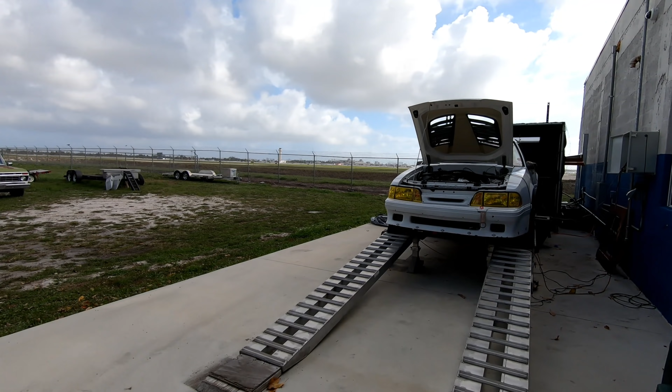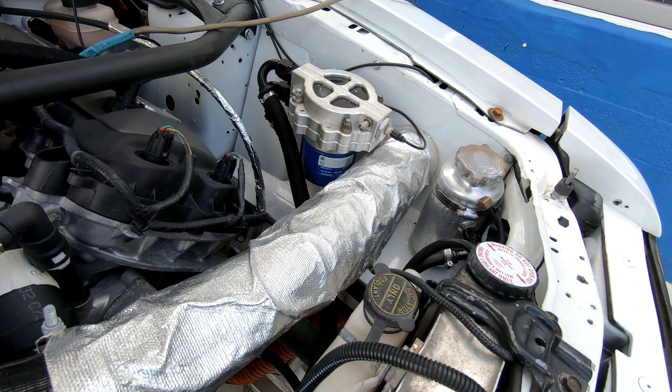That's the plan for today, and the test vehicle is going to be Frank Perdomo's Gen 1 equipped Foxbody road race car. As you can tell, it already has a smaller cold air than factory, but as you saw in previous videos, it's sampling the air from the fender away from any potential turbulence. It's a totally stock Gen 1 motor on a Ford Racing control pack, and it's currently on pump gas.

What we're going to do is warm it up, get it up to temperature, run it, make at least 2 hits to see what kind of numbers we get for baseline. I'm going to try to do it different this time - I'm going to try to max out this particular combo on his car, and then do the same thing on the 18 manifold, because the 18 manifold at the end of the day is the one that's going to stay.

This is Frank, by the way, everyone. If you want to roll it so the drivetrain gets warmed up, just hit the red button, I think. What you got going on in the aim dash? Show people the aim dash stuff, brother.

Here, grab the AIM MXG. It's a good lap timer for road racing. It's kind of pricey, but it's good. It has GPS antenna, CAN bus capabilities. You can program just about any sensor you want into it, in or out of their catalog. And you got all these different dashboard layouts you can run, customize with a laptop.

Different dashboard layouts you can run, different parameters you can set up. So you can see you got a tach. Just a really neat tool, really expensive tool, but it's really good for road racing. We use it a lot. Gives you predictive lap times too while you're running. They have all sorts of expansion modules for it.

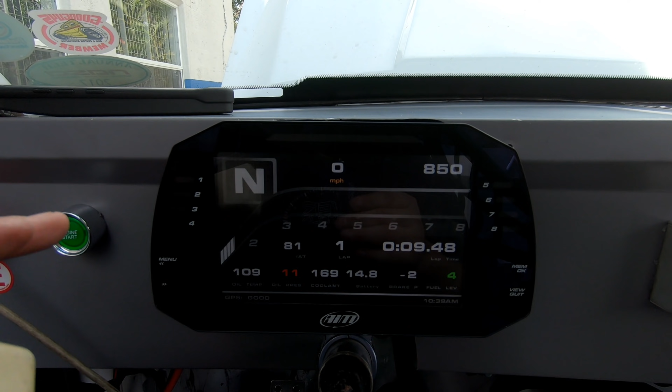So they have them in smaller sizes too. They now have a Strada that has, instead of all the racing stuff, all the factory looking symbols and turn signals and stuff like that. So it's not a bad option for Coyote swaps, F150s, and it's more streetable than the other.

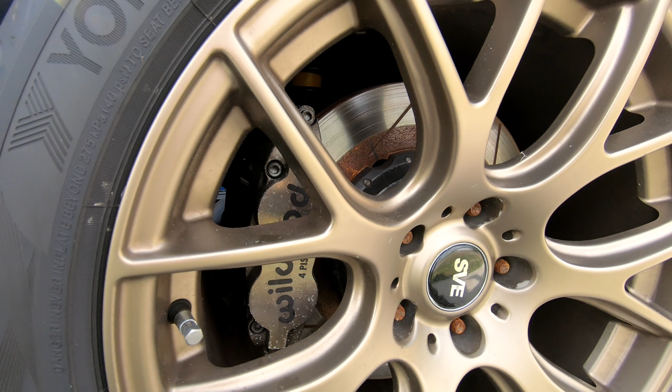Go around the car and see what the deal is. He's got his exhaust coming out the side, so people can definitely hear him. He's got a real nice Wilwood brake setup on the car, some SVE wheels. Car looks good, it's sharp. We left the wing on for maximum downforce on the dyno.

I'll go over the straps real quick. But yeah, let's make some baseline hits.

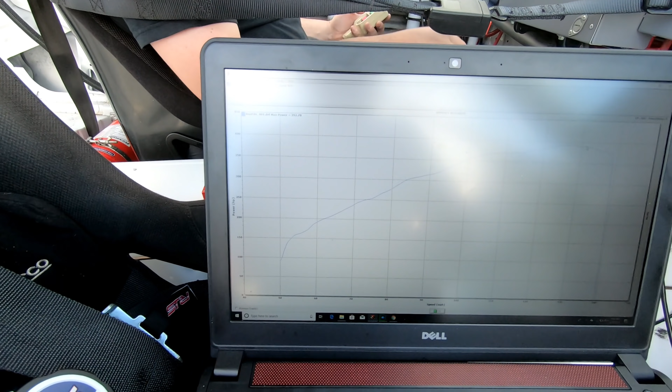She made 392. Let's go to torque right here. How much torque? 392, 362 as it sits.

So I'll look at the log, see what it did. I'm gonna try to do this - just the plan, I'm gonna try to max out this combo just to see what it does. And if there's meat on the bone, cool. If not, we'll just swap it all over.

When we originally did it, we got to a comfortable number. Everything is okay, we didn't try to max it out. And then we just started working on detuning it, which - I'll see what kind of gas quality we got, and if we need more timing I'll throw it in there. I lost the fuel pressure.

So I didn't like it. All right, so we'll use 392 as the baseline. All right, cool.

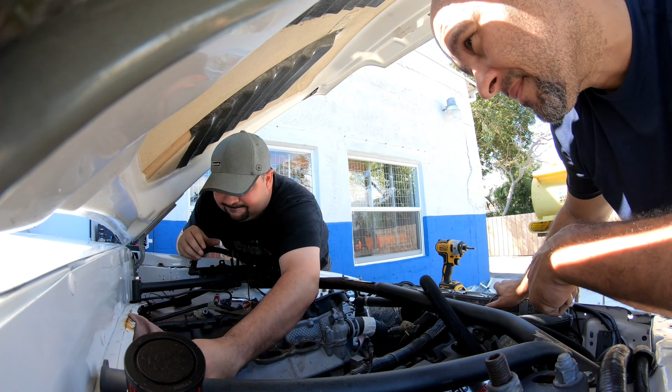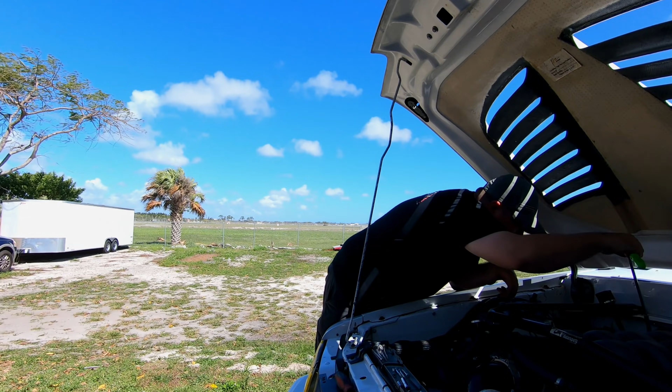Look at this day, I'm sorry guys, I gotta appreciate how beautiful it is today here in Florida. Probably what, 77, 76? The humidity is the key to that. There's no humidity. There's a breeze. The sun's out, it's hot in the sun. Yeah, but I'm telling you guys, why the hell do you live anywhere else? No offense.

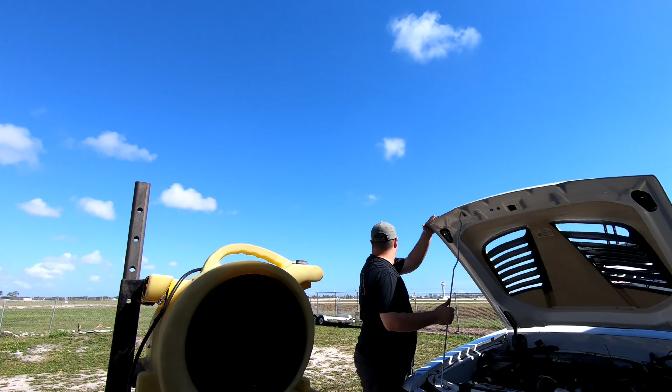Okay, back to this, sorry. Wish we had seasons, yeah, I just wish we had snow. I like to see the leaves change color. Whoa! And then rake them for 3 months. Shut the fuck up.

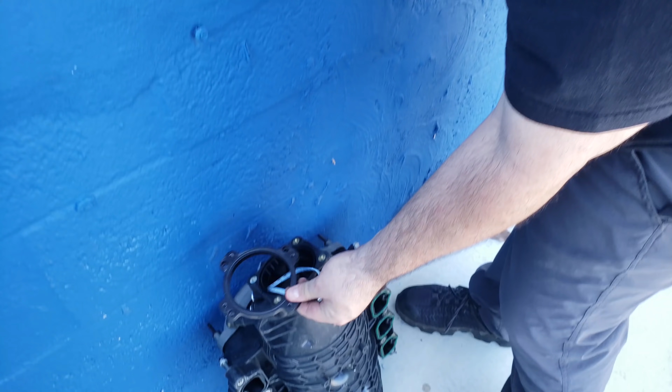Bracket - so this is for the throttle body on a Coyote? Yes, needs it to clock it to the right for our alternator bracket. Alright, so it's not a spacer, it's just to clock it. But if you need a spacer, they're exceptionally well made - so good that other companies have used it and then copied it. No shit. Alright, so put that on, stock throttle body, plug all the holes.

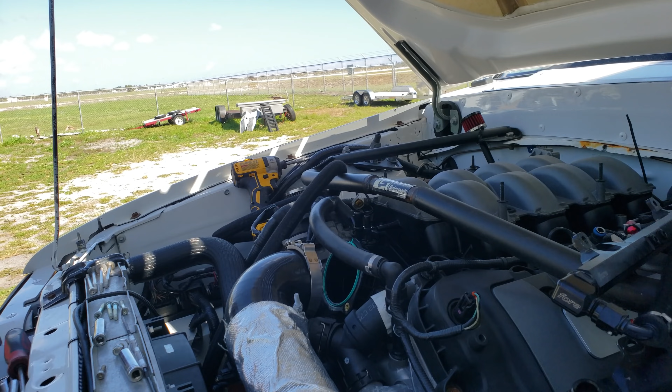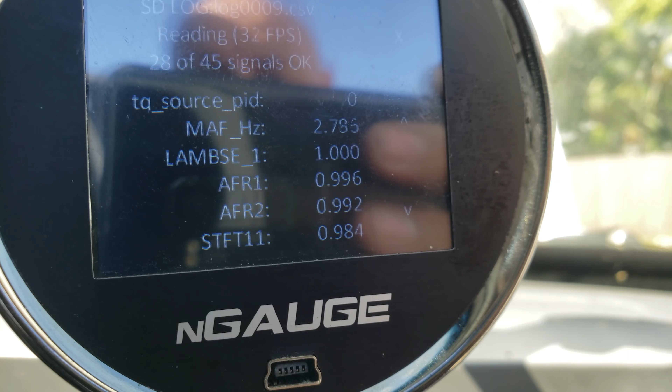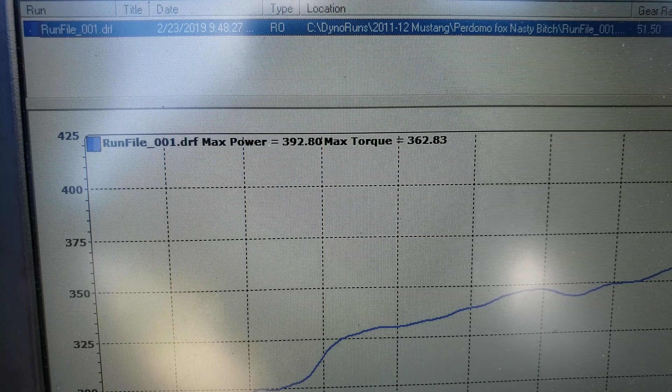Air Canada. Okay, so we're logging with the nGauge, and short-term fuel trim is 0.98 to 0.99 - it's literally perfect, within 2%. So we're gonna do an idle slow rev log on the dyno, and then we're gonna go WOT and record it over the max run of 392, 362.

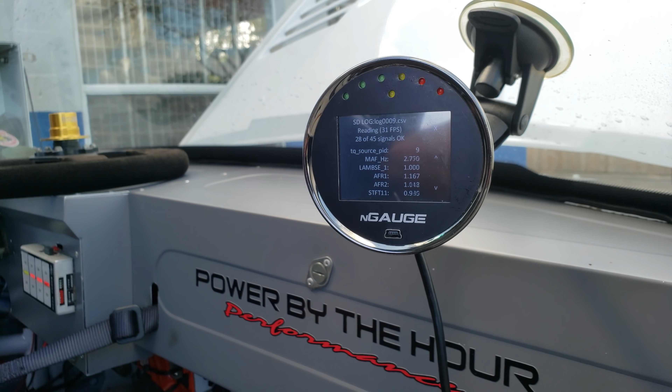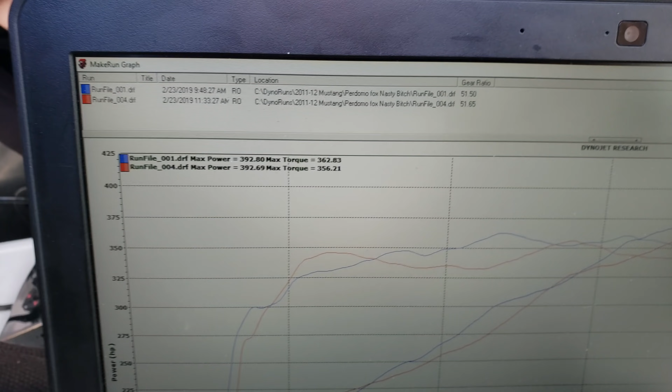How that works. What'd you let off at 7,000? Oh shit, I get a pull higher. You know what, make a pull to 7,700. I think the limiter is 77 on it. Because it went to 392, but it was still climbing - if you look at the graph, it's still climbing.

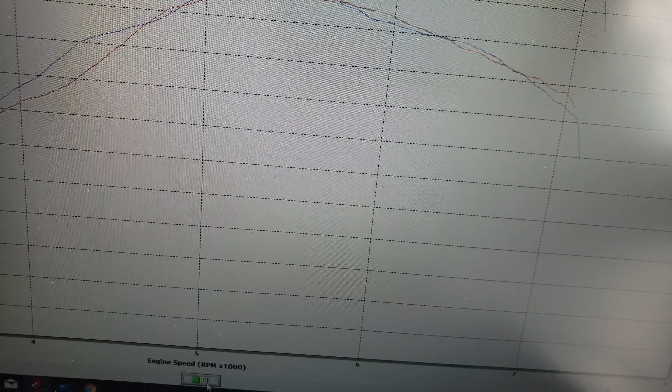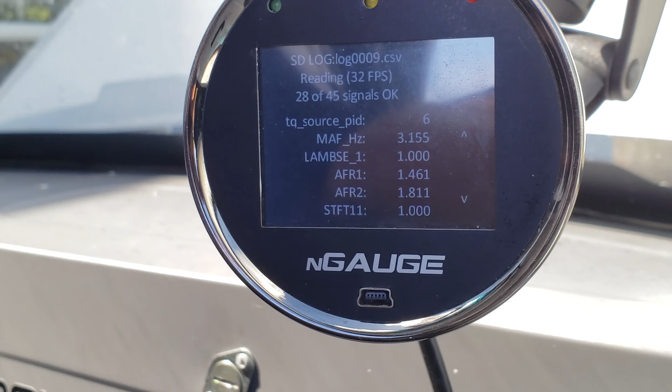So let me hit OK. If you make another hit, fueling looks good, so I'd say make another hit. Power might be down, but we'll dial it in. Timing's different.

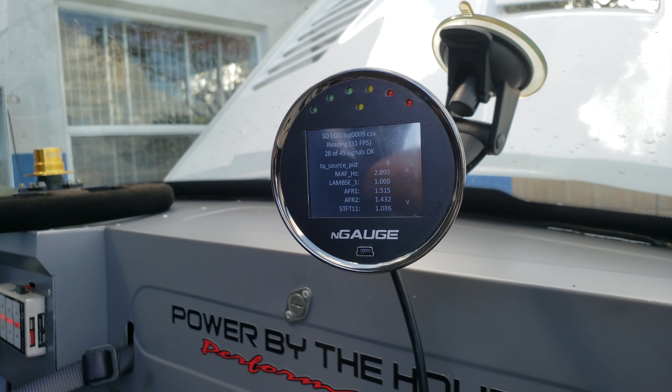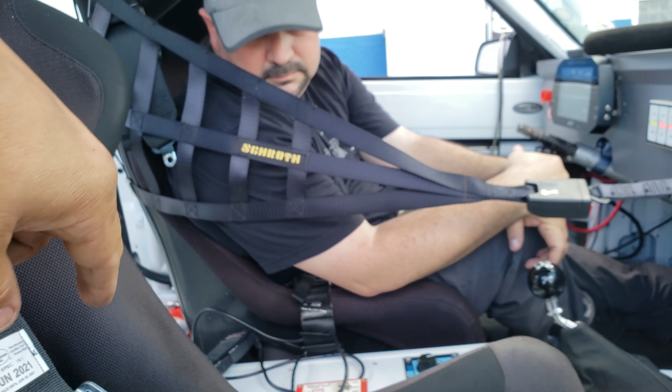Look at the red run, right? I'll flip it around, and you can see how power drops off in blue - that's the stock manifold. See how it drops off after 6,800? The other one carries, but peak is the same. People freak out about peak to peak, but it's just allowing you to use more power higher up. Exactly, so it brings the power band up quite a bit, and I think we're still hitting an octane limitation because of peak, but I'll look at the log and we'll see what we can do.

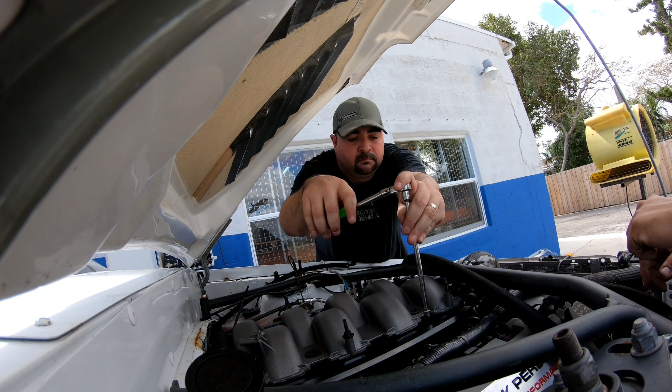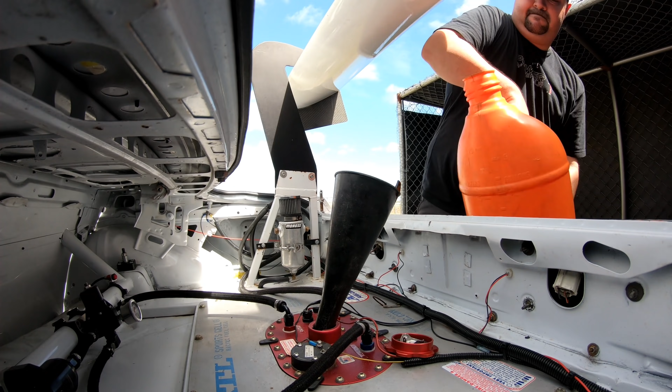So what, Frank, what happened? What's going on, why are we having issues with the FIC 1000s? Well, there's a big difference in injector data between the FICs and some of the other well-known injectors.

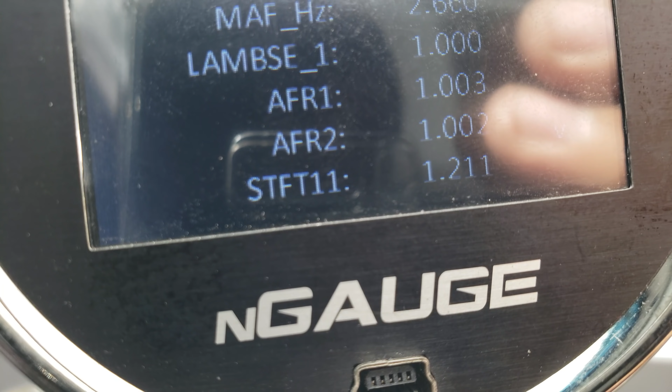So once I put the pump gas tune in it - well, it was stoich for E85 at 9.85, and it wouldn't even start. So I said okay, let me put the pump gas tune back in there, and it's trimming about 20 to 15% different. So it's about E50, E40.

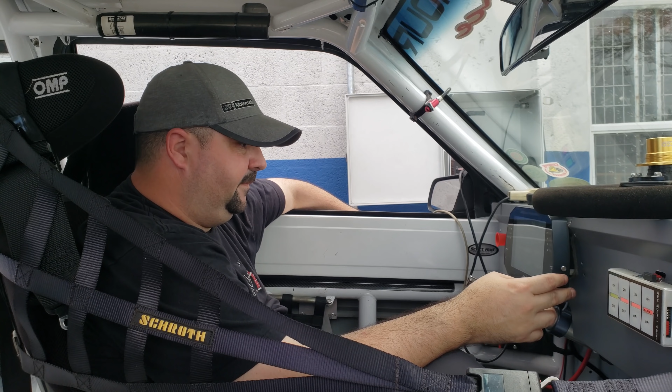So what he's gonna do is go get some actual E85 from a racetrack where I get it from - it's consistently E85. Then we're gonna put the tune back, the same tune I started on it, and see how close we are, and then we're gonna make a pull on E85 with the FIC.

Good job, Frank, way to get flex fuel. I appreciate it.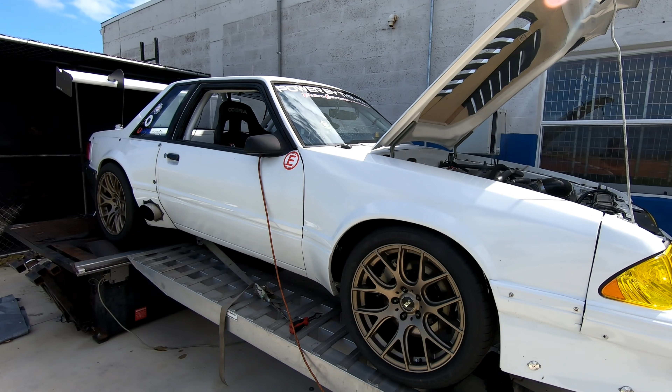Okay, we got E85 in there now, proper E85. I'm gonna pull it up to 7,700. I threw a bunch of timing at her because I know there's E85 in it with pump gas - when I tried timing it kicked it back. We'll see what happens with this guy. We're logging, see what we can get out of a fuel change.

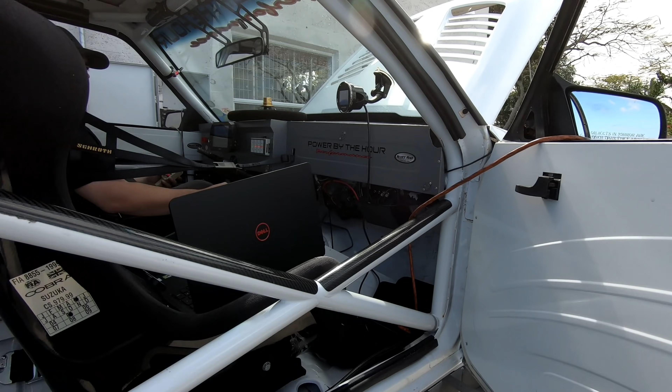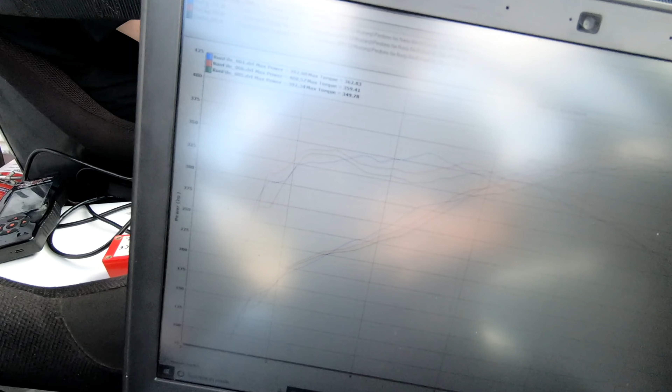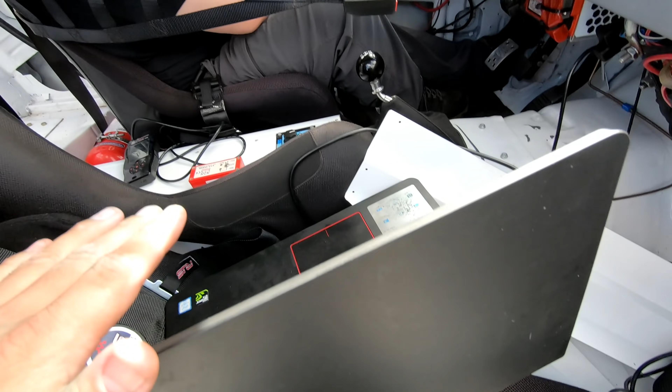Sounds good. 408, 359, and right around 7,500 it started to lay over - you look at the red graph, it's melted, but it's up everywhere. Power over the curve is up everywhere.

So run file 6, the red one, the most recent - it's the highest one, it's up over everything. Yeah, so you have power everywhere on the 85. It peaked where it peaked.

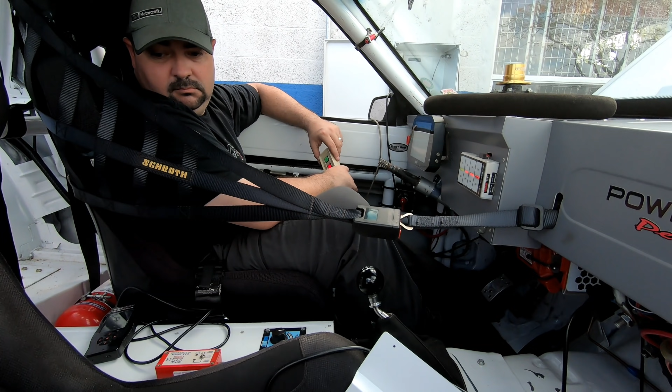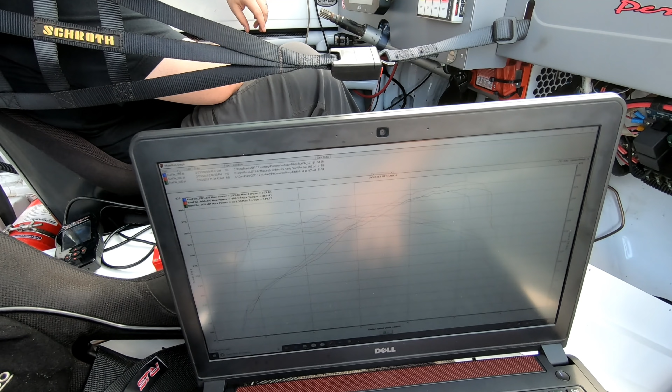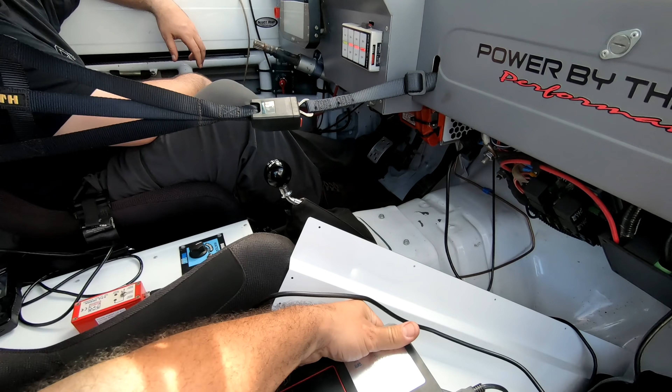Look at that, oh my god - E85 is up over everything. Red one is E85, the other one is pump gas, same manifold, same injector even. So, no, not same injector, we did get FIC.

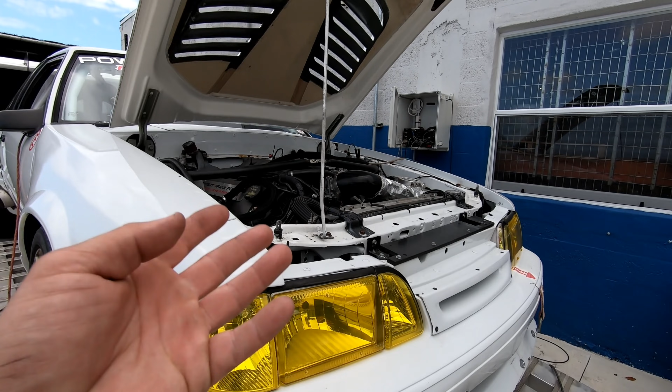So I'll look at the log and see if there's meat on the bone. Okay, so we're up 12 horse over pump gas on the 18 manifold on the 85. I just touched up the fueling a little bit, added a little bit more timing because at 30, 31 degrees anything after that it's just spark, not really throwing power at it. So I said let's make a final pull, see what it makes, and the next test eventually is gonna be a different cold air, but for now we're gonna keep it as is and see what we can make on this setup. I'm hoping for another couple horse.

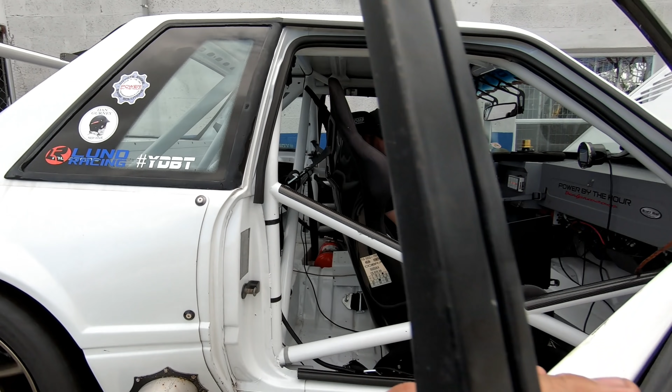See? 5 horsepower from a quarter or half a degree of timing.

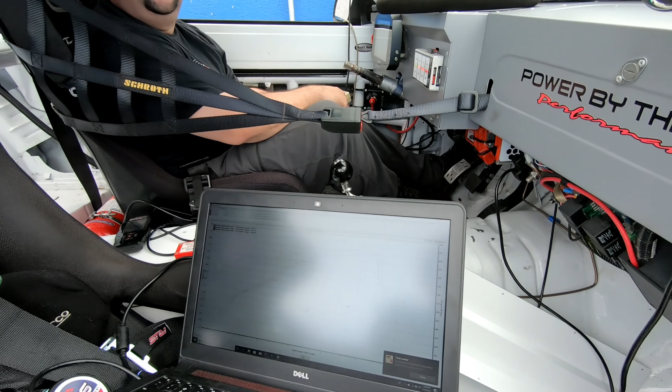Let's take a peek. Is it up everywhere? It looks like it. Yeah, I threw it in down low too, just in case. You can feel it at the beginning of the pull. Dude, this thing sounds badass.

So it's just gonna fall off. Remove selected run. Dude, that is so fucking pretty. Yeah, well that probably, I don't know what that fan is.

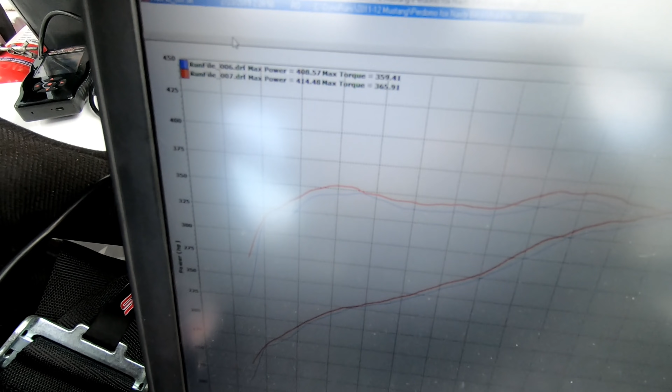It turned on, probably. So look at that, man. So, 414. 365, 7 foot-pounds of torque, 6 foot-pounds of torque, up and up all over the place. Let me take this with my cell phone, it's a lot clearer. There we go, this video is a little more clear.

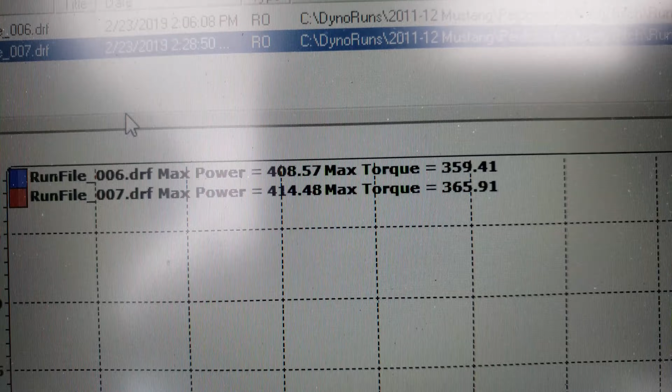So again, both 85 runs, the difference between the top and bottom runs is 3/4 of a degree. And I touched the fueling. Fueling was off 5%, now it's probably dead nuts. I'm gonna stop logging, I don't even gotta look at that log.

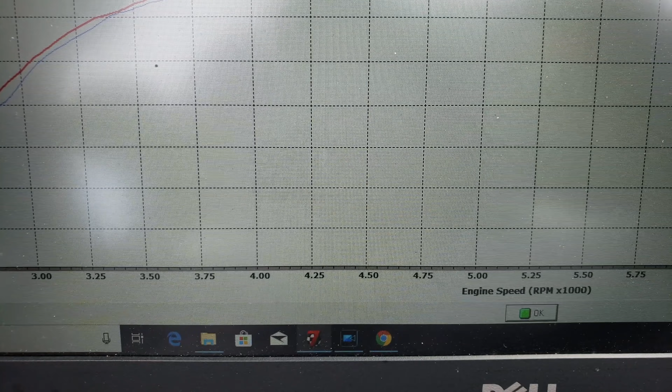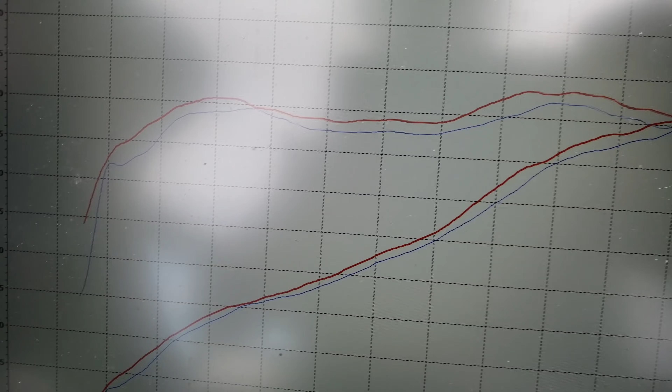That thing's pretty. So as you can tell, the other one started to roll off at about 6,500. This guy starts to roll off at about 7,500 or so. But I'm telling you, it's up everywhere. There's a clear separation everywhere based on spark. So, an 18 manifold on a Gen 1, 414 horse, and you got...

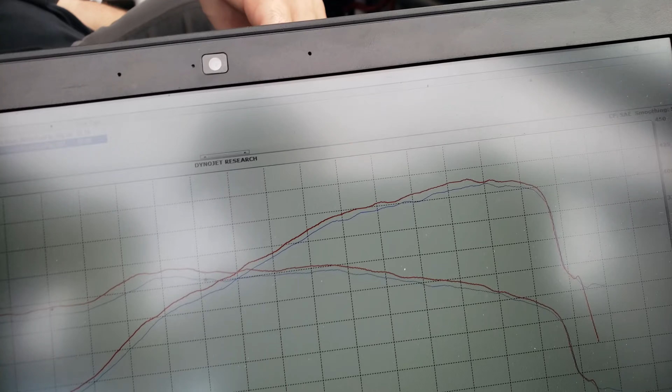usable power above 5,700. You got a ton of usable power. The other one would probably, I don't know. I mean, would you favor a torquier car that rolls off at 6,500, or a car that makes more RPM up top, like this one does?

I don't know, it worked with torquier, limited power. But I was driving it with 330 horsepower. You were restricted. You know, it's not like you're gonna take torque away from the 330. It was always at its max allowable.

I haven't tracked this car with full power, so I don't know what that's going to give us. Does that mean the car's harder to drive? Does the car, do I have to, obviously you got to start in different spots, right? Brake earlier and see how deep you can go, how much more speed you can carry into the end of the long straightaways, because then you don't know if the car can slow down to the speed you need to be at the entry.

So is it going to equate to 2 or 3 more mile an hour at the end of every straightaway? Because at Sebring, we're going almost 140 at the end of the back straightaway and about 135 at the front straightaway. And this versus that manifold is probably up 80 horse. Well, I was at 330 horsepower doing that. So 80 horsepower, if I can get off the turns properly, it's going to go 145 at least, I would think.

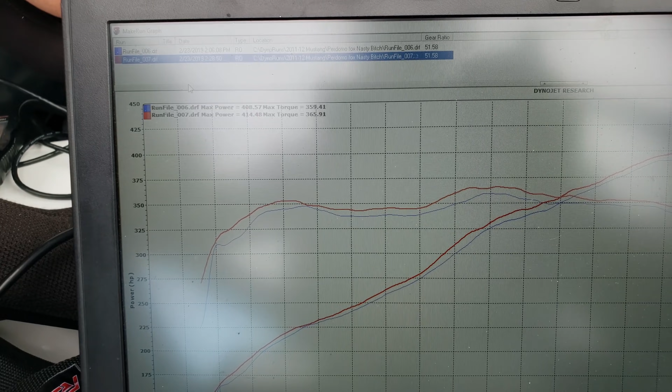So let me do this. I'm gonna take the laptop inside. I'm gonna label everything so that people can see the rundown, and we'll end the video.

So, you happy with 414 with FIC injectors on E85? 450. Yeah, cams, dude, cams and a big cold air, that's the next thing. Cold air is next. We gotta find a cold air.

Okay, let's share the results with Frank's Foxbody that has a Coyote swap from a Gen 1 car, a Gen 1 Coyote swap car, and we did the manifold swap, then we swapped over to E85 with some FIC 1000 injectors. So let's get cracking.

Stock manifold on pump gas pull yielded 392 rear wheel horsepower, 362 foot-pounds of torque. Peak power was at 6,500. Peak torque was at 4,300, let's say.

Then I attempted to throw more timing at it. Same exact vehicle, same exact mods. But people always tell me, Alex, send it, send it, send it, give me everything it's got. And it made less power. Why? Because we hit an octane limitation and the knock sensors kicked back power. So we made 382, 392.

Let's erase the runs and we'll see what happens when we went to the 18 manifold on pump gas. Look at that, exact same horsepower. But again, just like my vehicle over here, we're higher than we were with the stock manifold. You see the roll off go pretty hardcore on the stock manifold in red. Now Frank only pulled it to about 7,000 RPMs, but it's very apparent that the 18 manifold has a definite split here of about 15 horsepower or so, or 10.

And the 18 manifold has less of a roll off than the stock manifold. Obviously, just like before on my car, torque was better with the stock manifold up until about 5,500 RPM, and then everything past that point is pretty much 18 manifold territory.

So if you put these up, 18 manifold on pump gas versus 18 manifold, let me remove all runs. 18 manifold pump gas, 18 manifold max timing E85. Look at the insane separation we get there. We went from 392 on pump gas with an 18 manifold to 414. I know what you're gonna say. Whoa, my buddy made more and this other company made more. Well, guess what? If that other company can get on this dyno today, I guarantee the results are either similar or a little less because we're just better tuners.

So at the end of the day, E85 is my preference all the time, and this is why. Because when I tell it, here's the sauce, it reacts. There it is, proof's in the pudding. This guy peaked at 6,800 RPM, and there was less of a roll-off as opposed to the 392 run on pump gas. So now let's do a graph that shows 18 manifold E85 more timing versus stock manifold pump gas.

There you go. So there's a massive split here of about 25 horsepower at 6,000 RPM. There's a massive split here of about 25 foot-pounds of torque at the same RPM, 6,000 RPM. Peak to peak, let's say at 7,000 RPM, this car's making over 25 more rear wheel horsepower and about 18 or more foot-pounds of torque. E85 18 manifold versus pump gas stock manifold.

So it all depends on your configuration. Your stock manifold will make a decent amount of torque, but at the end of the day, I want E85 and a high revving manifold, high revving rev range for these Coyote cars.